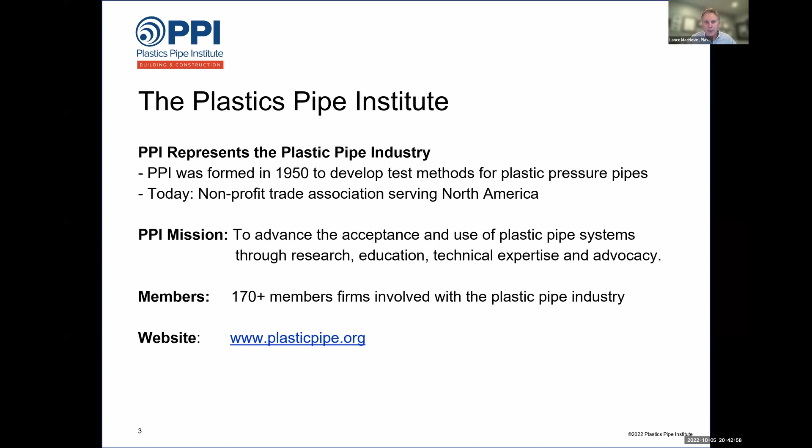These are companies that make plastic pipes or the materials or the equipment or the certifiers. They all pay dues to belong to our association every year, and that's what pays for the staff, people like me. Within PPI, if you go to our website, the first thing you'll have to click on is select a division.

And we have 5 different divisions. Everything related to plumbing and mechanical falls within the building and construction division. So we probably should be known as plumbing and mechanical, but we're known as the building and construction division, or BCD. And the materials that we represent are kind of shown in this family picture down below.

So in alphabetical order, we focus on the pressure pipe materials shown here: CPVC, HDPE, PEX, PERT, PEX aluminum PEX, and polypropylene. And by the way, we're a nonprofit trade association.

We don't sell anything. We're, like I said, supported by our members, and a big part of our job is to do education, and to promote the products and teach people how to use them correctly and things like that.

So these pressure pipe materials within the building and construction division are used for the kinds of plumbing and mechanical applications that you can imagine, shown here in the picture. That's plumbing and water service, fire protection. On the mechanical side, we've got radiant heating, radiant cooling, other kinds of hydronic piping, outdoor snow and ice melting, and geothermal systems. Those applications are served by all these types of plastic pipes, and we get involved with all of those.

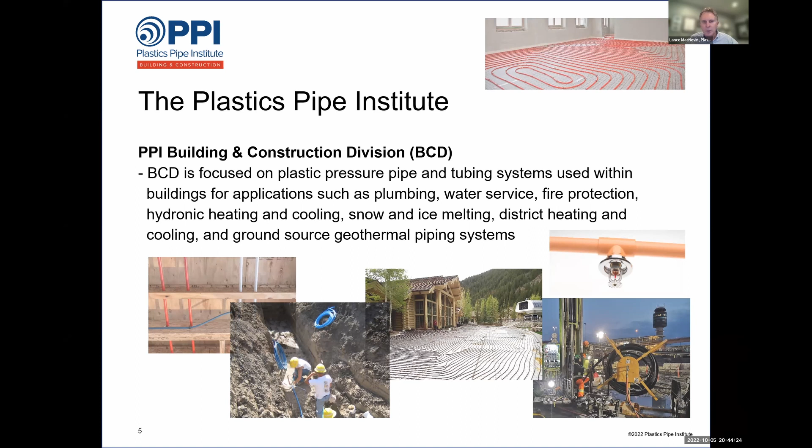So that's a bit about me. In terms of introducing the course and getting you ready for what we're really going to talk about here tonight, we're going to first introduce the 6 types of plastic pipes that we'll find in construction.

And these are plastic pressure pipes used in construction. So again, alphabetically, we've got CPVC, which we're going to talk about tonight, HDPE, which stands for high density polyethylene, PEX, which stands for cross-linked polyethylene, a newer material known as PERT, polyethylene of raised temperature resistance, and a family of materials known as polypropylene.

So there's polypropylene pressure pipes. There's also polypropylene used as vent pipes, but we're not going to talk about that. We don't get involved with that. And there's PVC pipes, which are both used as pressure pipes and then obviously as drain waste vent pipes. We don't get involved with PVC pipes either. There's actually other trade associations that focus on PVC, so that's not us.

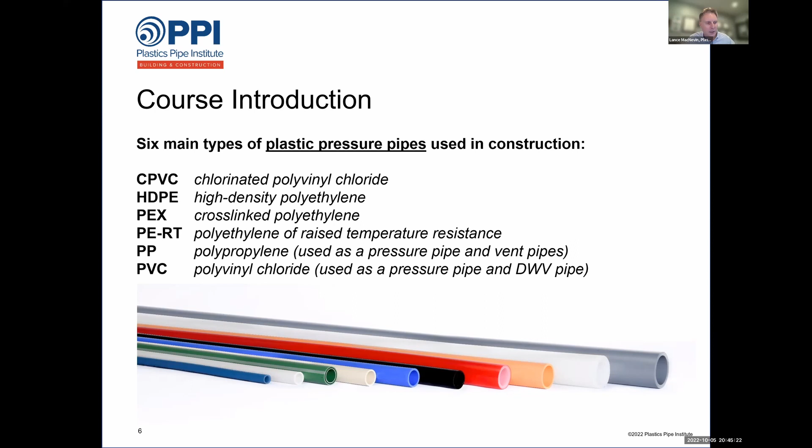So what we are going to focus on tonight, though, are the 2 most common types of pipes used for hot and cold water plumbing and hydronic applications inside homes and buildings.

The way that we know the two most popular pipe materials are PEX and CPVC is this graph here, which is market data from Home Innovation Research Labs, from an annual report they sell called the Builders Practices Survey Report. This is basically just asking builders around the country what kind of pipes they've used lately in the past year.

What this data shows is when it comes to new residential construction, about two-thirds of all new houses around the country are using PEX or PEX aluminum PEX, which is less common. The next most common material is shown by the red line, CPVC, then comes copper, and then some of the other materials down at the bottom.

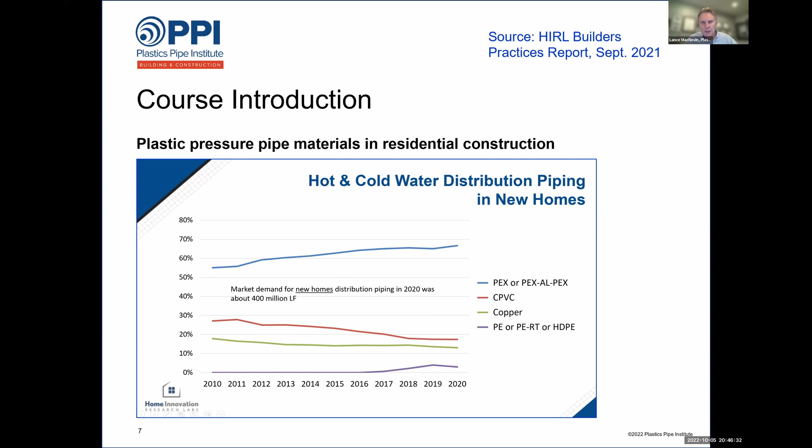So we're going to focus on PEX and CPVC, the most common ones. But here's our course outline. First, we're actually going to talk about polybutylene, which isn't used anymore and hasn't been for sale for 25 years in North America. But we are going to show a few pictures of that for recognition purposes, so that when you're looking at a house and you see plastic pipe and you're trying to figure out what it is, we'll give you some codes and markings to look for to identify if it's polybutylene or not.

Then we're going to talk about some universal requirements for plastic pipes, having to do with health and safety requirements that apply to all kinds of plastic pressure pipes. Then we're going to get into CPVC in detail and talk about its history, its capabilities, the standards used for CPVC pipes, some test requirements, and the joining systems, with lots of pictures.

Then we're going to do the same thing for PEX: talk about its history, its capabilities, the standards that apply, some test requirements, and the joining systems for PEX. There's lots of different fitting systems on the market for PEX, so we've got pictures of them all that we'll show so you know how to identify them.

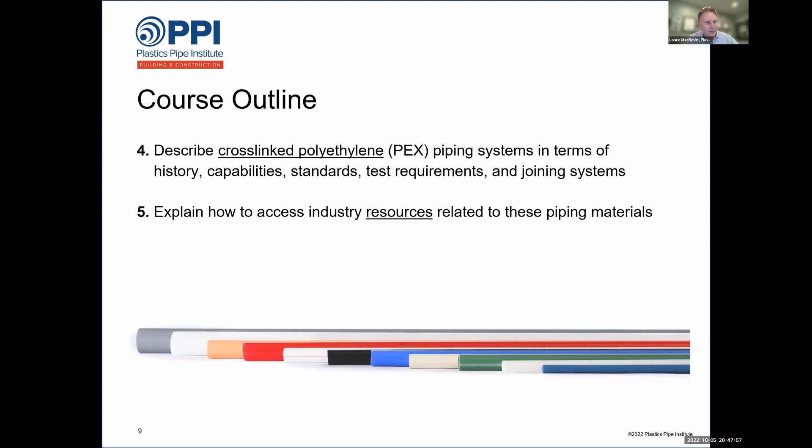Then at the final part, we'll talk about how to access some industry resources. I'm going to give you a very quick tour of our own website so you can find some of the really important information that's on there. Again, it's all open to the public, it's all free, and there's a lot of good resources out there.

So that's the plan, and we'll start at step one, which is polybutylene piping systems. Again, this is a bit of a trip down memory lane. Polybutylene systems were introduced way back in the 1970s as an alternative to copper. People loved the flexibility, the fact that it came on a coil - you could have longer lengths with fewer joints and just bend the tubing around trusses and other obstructions inside the building. It was faster to install and less expensive than copper, even back then.

This map is not ours - it came from some lawyer website. The darker blue equals the states where polybutylene was more likely to be used. So a lot of you tonight are probably in some of those states and have come across this quite a bit.

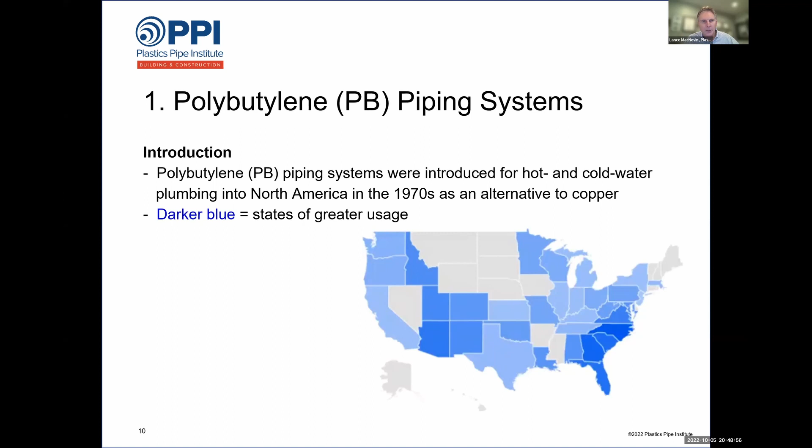You probably also are aware that by the 1980s, some of the polybutylene systems already were experiencing some failures. Most of those failures were called premature oxidative failures, where the product became brittle and then would fail. Most of the early failures were actually in the fittings. The gray plastic fittings that were used from the beginning with polybutylene were not actually made of polybutylene - they were made of a material called polyacetal. The chemical code name for that is POM, which sometimes may be marked in those fittings.

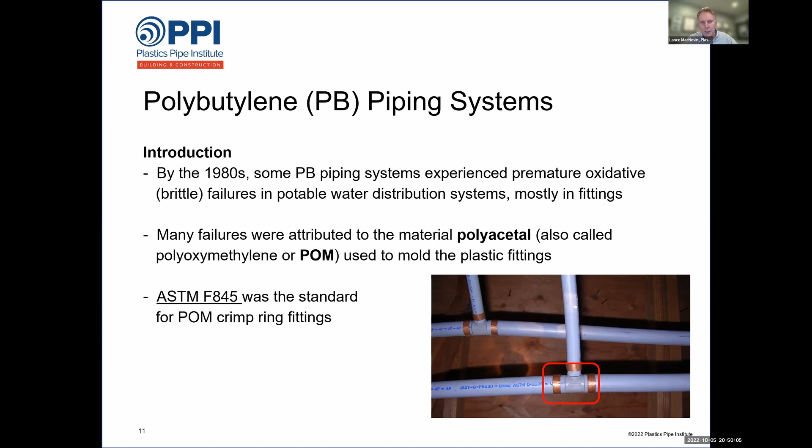It turns out that polyacetal was just not very resistant to chlorine at all. Cold chlorinated water, cold water - no problem, but hot chlorinated water is a problem. And the fittings would start failing quite prematurely. The standard for those fittings is called ASTM F845. So if you're ever looking at one of those fittings and trying to identify if this is a polyacetal fitting, it should be marked with F845 on it.

So here's just a close-up of a couple of fittings in one of these systems. These are crimp ring style fittings, so the copper rings are the crimpers. A tool is used to crimp those copper rings over the tubing, compressing the tubing over ribs in the fitting. It's a good design of fitting, and the fittings themselves were strong enough and everything else.

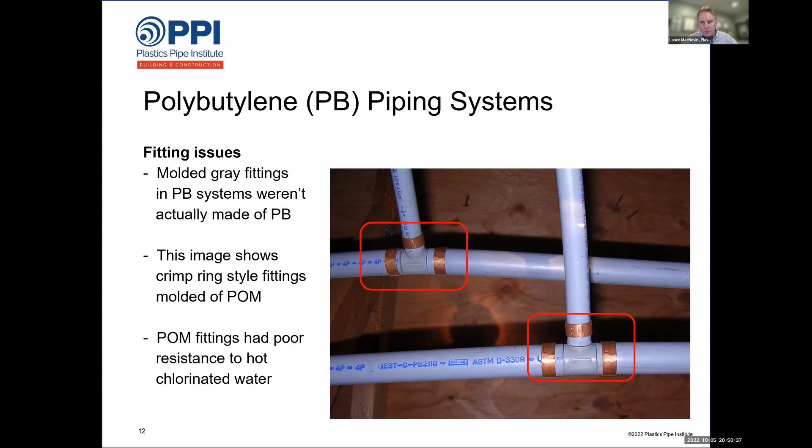But the problem is if they were attacked by the hot chlorinated water, then they would start to oxidize, which is kind of like you getting a sunburn. If that's ever happened, basically from the fitting's perspective, if you sliced one in half and looked inside, you'd see a white chalky surface inside if it's truly being attacked by hot chlorinated water.

And that chalky surface allows some of the material to dissolve into the water and wash away. It's really breaking the molecular bonds between the material. Even if it's not washing away, it's losing its strength and getting very brittle. Especially for an elbow or a T, if there's any kind of stress on the fitting, they could just crack apart and break apart, and you'd have a big gusher kind of leak.

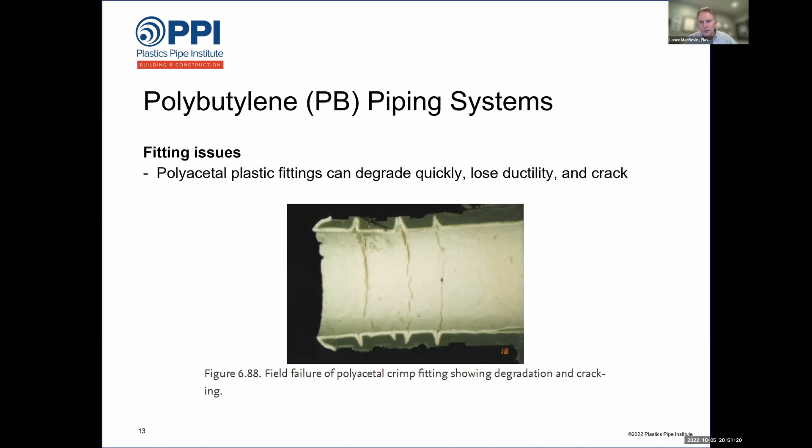So a lot of those fittings have already failed up till now, and have been replaced because they just wouldn't have lasted this long in a lot of cases.

So what the industry did when those fittings started failing is they developed copper crimp fittings. In this case, the whole fitting was made of copper or brass, but copper was really popular in the beginning. Those fittings were made to a different ASTM standard called F1380, and they were good.

The material, the copper, was fine, and the copper crimp rings were fine, and the compression, the seal was fine, and they were great—unless you're in a place where copper actually gets attacked by the water. There's a lot of those places around the country where copper does just get attacked by the water, which causes all kinds of different types of corrosion inside the fittings.

So then what the industry did to try to eliminate the amount of fittings in the wall is they came up with home run plumbing systems with centralized manifolds, accessible normally in the mechanical closet where the water heater was. You'd run a dedicated piece of tubing, either 3/8 or 1/2-inch tubing, directly from that manifold to each outlet or fixture—directly to a shower head or a shut-off valve below a toilet or a sink.

And therefore, it would be a continuous piece of tubing inside the wall from start to finish with no actual fittings. So you're completely eliminating the risk of fittings inside the wall because there is none. You've probably seen lots of manifold systems out there, also known as home run plumbing systems. It's a lot like electrical wiring from a circuit breaker.

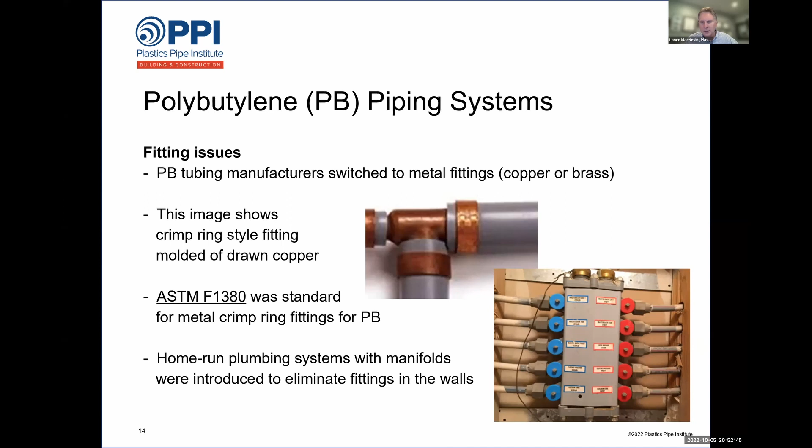But there were still failures, and even with good fitting systems, or even with no fittings inside the wall, sometimes the tubing still failed itself.

Without getting into all the details, some of the polybutylene that was used was just not that chlorine resistant. A lot of it was great, and it all could have been great, but some things were done in the industry that ended up using some, let's say, less than perfect materials for polybutylene in a few different cases. And in some cases, the installers just didn't know how to deal with the material properly.

They would scratch it or gouge it during installation, or kink it and then straighten it up with a pair of vice grips and put it in service. But that damage would sink into the tubing over time and lead to some stress points that eventually would fail.

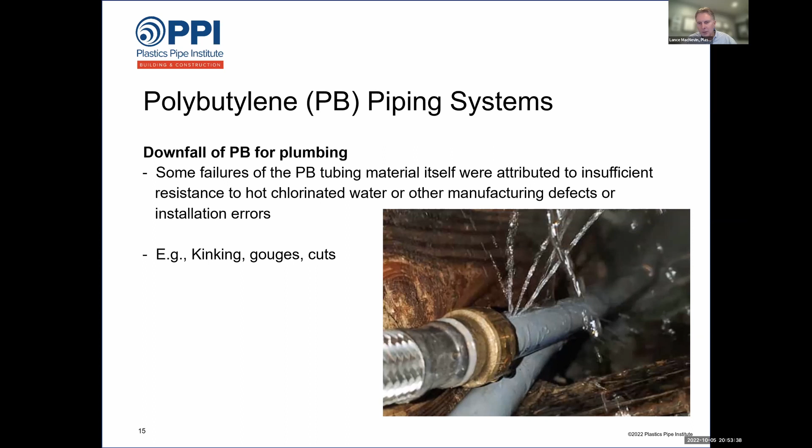So some of the polybutylene tubing definitely has failed, is failing, or will fail in the future, but not all of it. You're probably all aware of the very large lawsuits that were settled. This goes back to the mid-1990s and the late 1990s. Some of the biggest class action material lawsuits ever were about polybutylene tubing.

The companies involved with that were Shell Oil, which made the polybutylene resin itself—they didn't make the tubing, but they made the material. And then two other companies: one called Hoechst Celanese, a European supplier, made the polyacetal material, and DuPont also made the polyacetal material under a different brand.

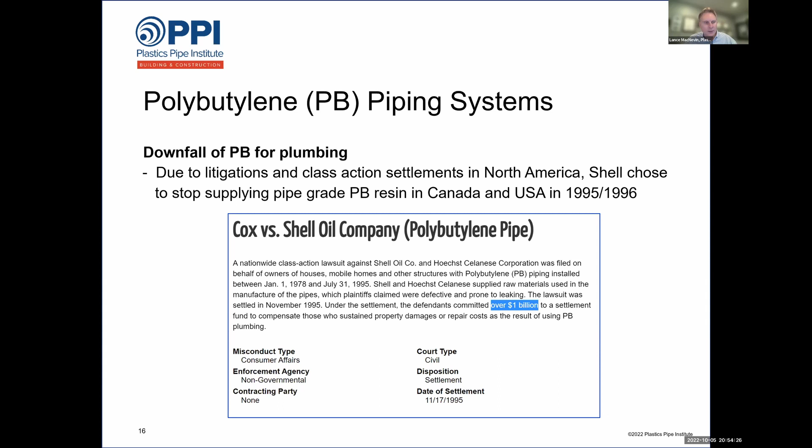So those three companies ended up being involved with this lawsuit and ended up paying out probably close to $1 billion in different kinds of settlements around the country for pipe replacement.

So to help identify these products, here's another close-up of the tubing. From left to right, the markings you see: Qest was a brand name. US Brass was one of the manufacturers of the tubing, and their brand name was called Qest. That's marked on this tubing here. It's nice that you can see the brand.

PB2110 is a material code for the actual type of polybutylene material used for the tubing, and that's the material allowed for hot and cold water tubing. The NSF-PW mark shows that the tubing was tested and certified for drinking water safety - PW means potable water, and it was tested by the organization known as NSF in Michigan. And then ASTM D3309, that was the ASTM standard for polybutylene tubing. So this tubing is well marked, well identified, and we know exactly what this was.

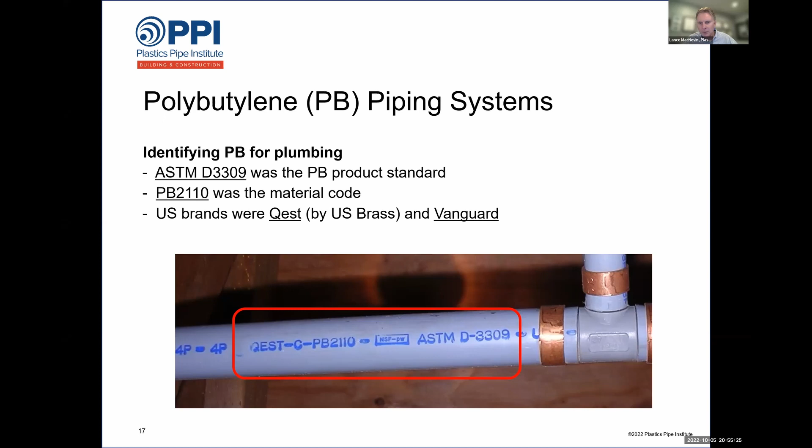Now there was other polybutylene tubing used for other purposes as well. Water service line was a popular application for polybutylene. And in fact, in my house where I am right now, my house was built in 1993, and I know for a fact it has polybutylene water service line.

And in this case, the pipe is just a cold water service line pipe. It didn't fail because of chlorine in the water. It actually failed simply because where it was connected to the curb stop in the meter box, it wasn't backfilled very well. And with all the movement of the ground over 25 plus years, eventually there was scraping and gouging in the pipe, and it eventually just cracked.

The pipe did become less flexible over time, and all the movement at that joint by the valve, it just couldn't take it anymore. Then one day a crack opened up and it started leaking, and the water department called the homeowner and said, 'You've got a leak, fix that or else we're turning your water off.'

And it lasted until about 2018, I think, when my neighbor's service line failed. That's when I got this sample - a good 25 years or so. The pipe for my own house is 29 years old. It's still going strong, and I have no plans to replace it unless it ever fails on its own.

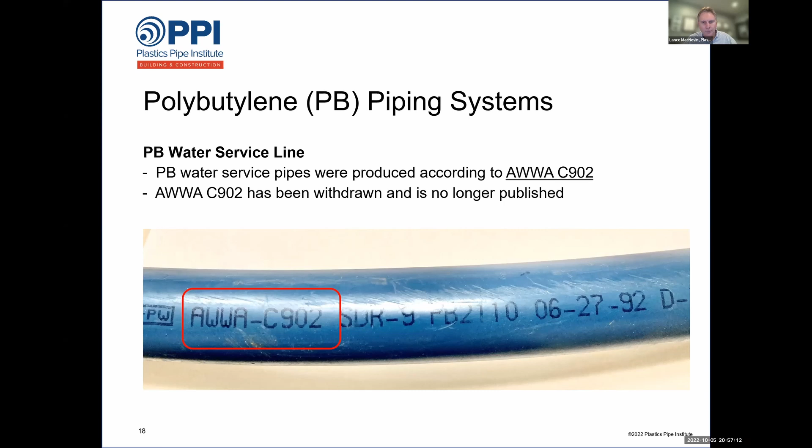And then I have a coil of PEX in the back closet that I'm going to use as the replacement. We'll talk about PEX here later today.

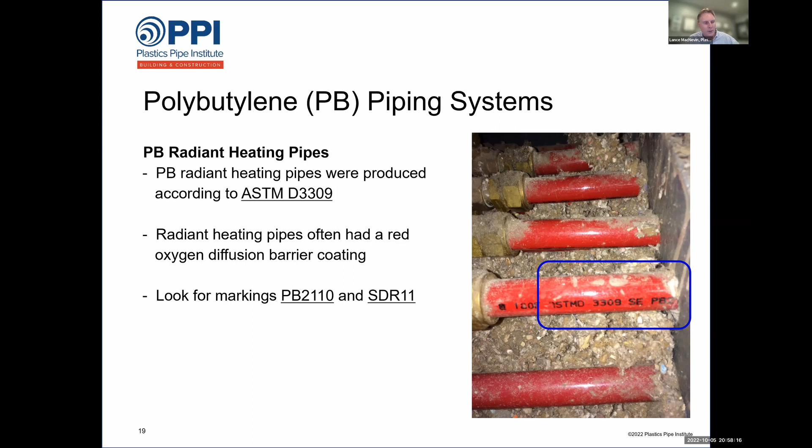In this case, this tubing could easily last for 50 years. I don't know how old this picture is or how old this tubing is, but there's a very good chance it could last for 50 years or more, because most radiant heating installations, if well controlled and well installed, don't need to run at very high temperatures - maybe just 120 degrees Fahrenheit or less on cold winter days. So this tubing could easily be there for 50 years or more and be completely okay.

There is a document on the PPI website that you can access, because what we're going to be talking about later this evening is cross-linked polyethylene, or PEX, and PEX is a lot better than polybutylene. In fact, we even have a PPI document on the website, called TN31, that explains the differences between PEX and polybutylene.

The first is that PEX tubing is cross-linked. I'll explain that with a picture in a few minutes. But what that means is when you have a piece of PEX tubing, most of the molecules of polyethylene are actually cross-linked and linked to each other. So a piece of PEX tubing is kind of like a chain link fence with all these molecules connected to each other. That makes the tubing both more flexible, like a chain link fence, but also gives it a lot of toughness and resistance to scratching, gouging, and cracking.

PEX tubing also has a thicker wall than polybutylene did. It's SDR9 - I'll explain what that means in a few minutes - but it means the wall thickness for a given diameter is about 22% thicker than it was for polybutylene. So that makes it tougher.

And nowadays, ever since the year 2002, it's been a mandatory requirement that all PEX tubing for water be tested for chlorine resistance, and that was not a requirement for polybutylene. It turns out polybutylene was slightly resistant to chlorine, but not good enough in many cases around the country where higher levels of chlorine are used. So now it's a requirement for PEX to prove it's resistant to chlorine, but that wasn't even a system in place for polybutylene back in the 80s and 90s.

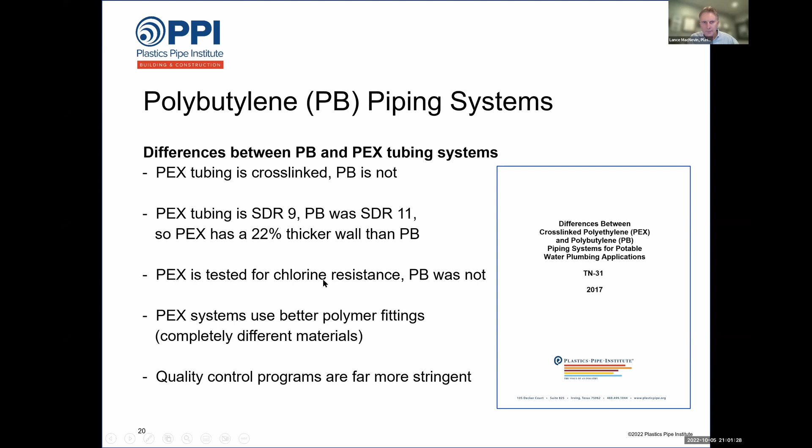So companies not only have no incentive to cut corners because of our legal system in the US, they're also highly regulated and highly controlled so that they couldn't cut corners if they wanted to, because they would get caught. So the industry today is much better than the industry was 25 years ago.

And just to summarize the polybutylene topic: the first thing we said is that polyacetal fittings were susceptible to hot chlorinated water, and that led to a lot of their failures. Some of the polybutylene was also susceptible to hot chlorinated water. But there's a lot of polybutylene tubing that is perfectly okay in cold and hot water plumbing systems and will easily serve out a life of 50 years.

But it all depends on the quality of the tubing, how nicely it was installed, whether or not it was abused during installation. It also depends on the temperature of the water system it's in and how much chlorine is being used in that town or by that utility. So some of the polybutylene will be around for 20 more years, whereas other polybutylene won't. In fact, there could be a failure tomorrow somewhere of polybutylene that's just reached its end of life.

So that's about it on polybutylene, and I guess we'll take questions via chat.

The next thing I was going to touch on - we're calling this part an introduction to plastic pressure pipes - and we're going to just touch on some terminology that applies to all different types of plastic pressure pipes, so you understand the rules that apply to the industry and what some of these terms actually mean.

And the first thing we're going to introduce is the topic of the standard dimension ratio. The official definition is given here: it is the ratio of the outside diameter to the wall thickness, calculated by dividing the average outside diameter of the tubing by the minimum wall thickness.

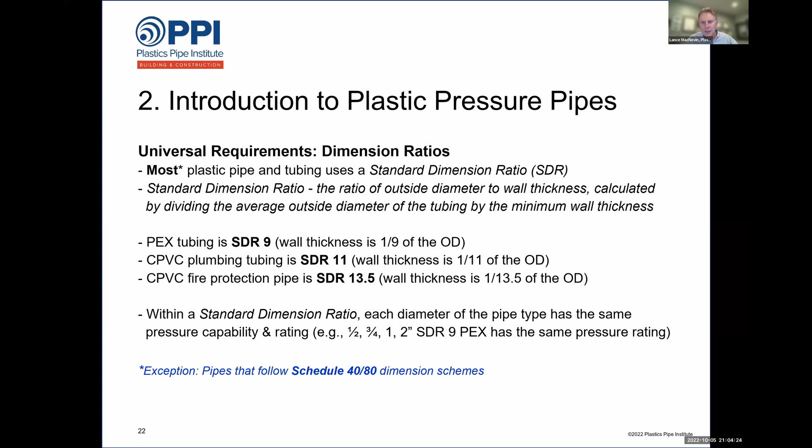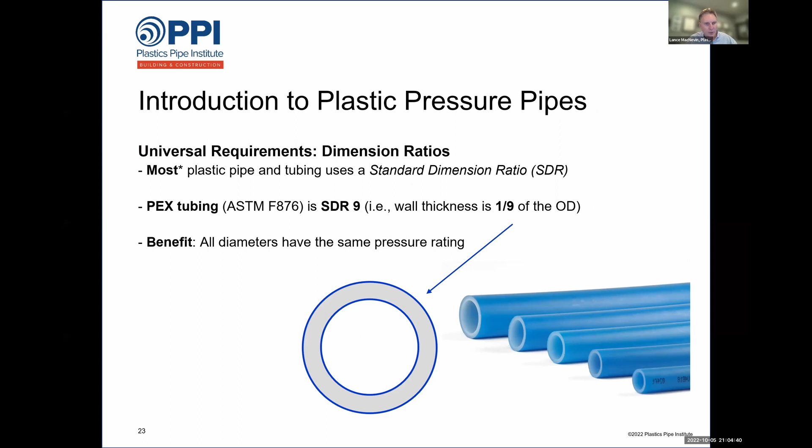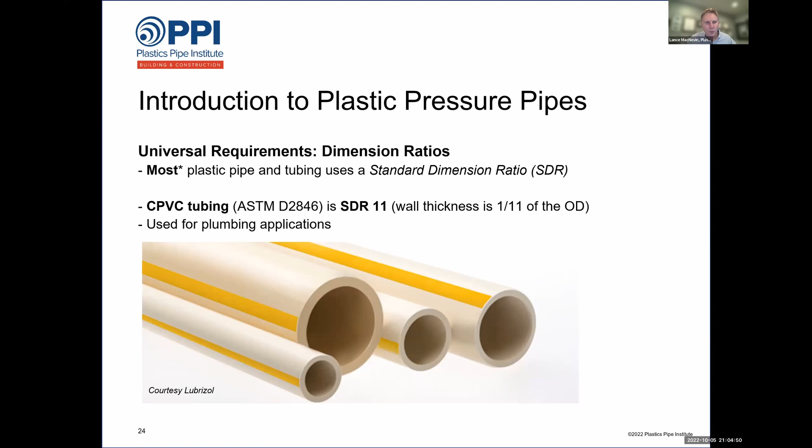Here is a close-up of CPVC tubing, commonly used in residential plumbing. This is SDR11, so again the wall thickness is 1/11 of the diameter. That's just some terminology from the plastic industry that we thought you'd want to know.

The other thing we want to touch on is a universal requirement having to do with drinking water safety. It's a requirement by state law and by our plumbing codes—Uniform Plumbing Code, International Plumbing Code, National Standard Plumbing Code, Canadian Plumbing Code—that any pipes or fittings used for hot and cold water must be tested and certified to this standard, known as NSF 61, or the full name NSF ANSI CAN Standard 61, toxicological evaluation for materials in contact with drinking water.

I won't get into all the details of how they do that testing. It takes about a month and a half to test a given pipe or fitting, and it costs about $15,000. It's a very stringently done test.

What they do is basically put super clean, purified water in a pipe or fitting, and leave that water there for a little while, then take the water out to see if it extracted anything from the tubing or fitting that could potentially affect human health. They test for hundreds and hundreds of chemicals that could come out of plastic.

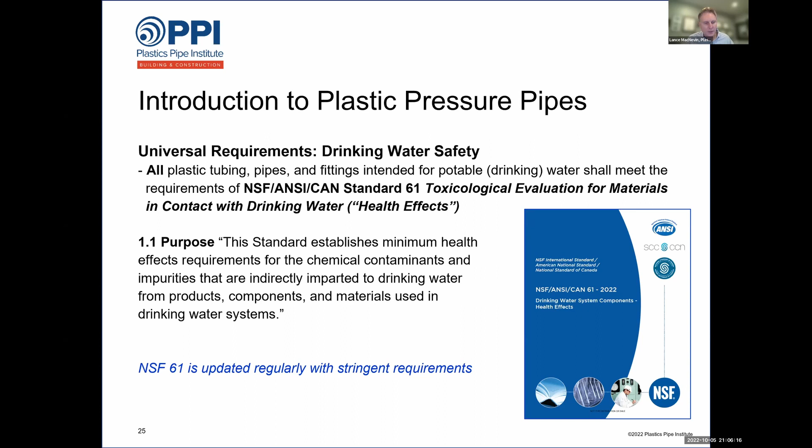Only the products that pass that test get to have the letters NSF-pw on them, or the code NSF61 marked on them, to show they've met this requirement. This is a mandatory requirement—it's not optional.

One other universal requirement has to do with the pressure rating of both CPVC and PEX tubing. Both of these products, as called out in some of the codes, must be rated for a pressure of 100 PSI at 180 degrees, and those are continuous use pressure ratings.

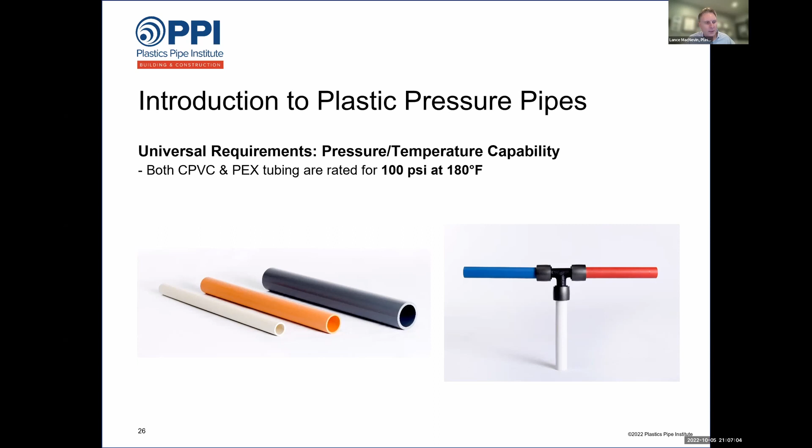So the products go through what's called long-term hydrostatic testing in laboratories—years worth of testing, sometimes literally more than 2 years—at elevated temperatures and pressures, to be able to predict these products should withstand 100 PSI at 180 degrees continuous temperature for 50 years or more. That is the expectation of today's plastic piping products.

And then, of course, when it comes to the benefits of plastic pipe—why are we even talking about plastic pipe, why would people want to use plastic instead of copper—obviously, it's the cost. It's a lot less expensive, and it's a lot easier to install plastic because of the flexibility, especially with PEX versus copper.

But there are lots of other benefits as well in terms of the products being smoother—you don't get mineral buildup. It's also better for the planet to make plastic pipe than copper. Just look up a copper mine and you'll see what it takes to actually extract copper, produce it, and convert it into tubing.

The plastic tubing is a lot less expensive. Obviously, it's not going to corrode. Corrosion is impossible, so that's a big deal.

It can withstand really high velocities. It can withstand surge pressures when you have fast closing valves, like at a washing machine or an ice maker. So the plastic products can actually absorb those surge pressures, so there's less chance of water hammer. And they're general insulators - inherent insulating properties apply to both PEX and CPVC, so they actually reduce heat transfer.

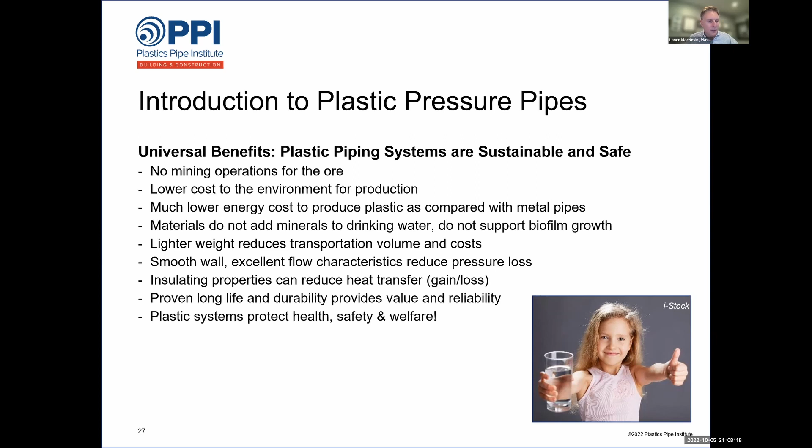So there's a lot of benefits to plastic, not just being less expensive, which is a good thing, but all kinds of other functional, practical benefits as well.

Now we're going to get into the details of each of these materials, starting with CPVC piping materials. We're going to focus on CPVC tubing, pipes, and fittings. When we say tubing, that means a copper tube size product. When we say pipe, that means an iron pipe size product. Residentially, you're always going to find products that are copper tube size, meaning they have the same outside diameter as copper. But in commercial plumbing systems, you would find more the iron pipe size, IPS pipes. So essentially, they're the same products, but with slightly different dimensions between a tubing and a pipe.

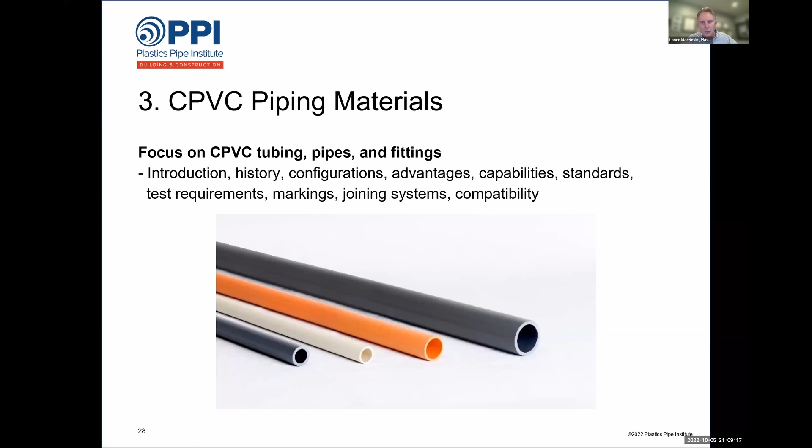We're going to talk about the history, the configurations, the advantages, the capabilities, the standards that apply to these products, some of the test requirements, the markings that you should see, the joining systems, and a little bit on chemical compatibility. So first of all, introducing CPVC.

What it is, it's a PVC material that has been chlorinated via a free radical chlorination reaction. That's what the chemists tell me to say. I don't know exactly what that means - I'm a mechanical guy, not a chemical engineer. But basically what they're doing when they make CPVC is they start with PVC raw material and they add an extra chlorine molecule to it.

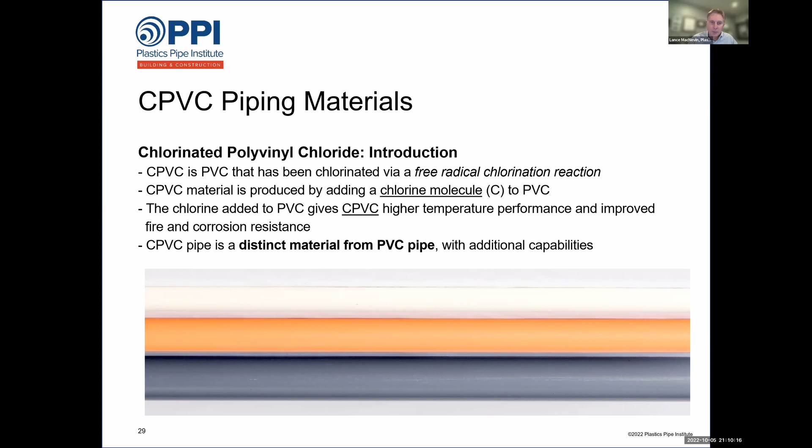Well, no, I'm listening. So that extra C in CPVC really does make a big difference. It makes the product able to withstand extremely high temperatures and higher pressures, and gives the product other better properties as well compared with PVC. It's more expensive, but it is a better product. And PVC is not approved for hot and cold water distribution inside a house, but CPVC is. So this is the product that we're talking about here, and it's actually been around for a very long time.

CPVC, like I said, it's rated for high temperatures. The tubing is rated for continuous operation up to 180 degrees Fahrenheit. It can actually withstand much higher temperatures than that, but 180 degrees Fahrenheit is as high as the markings go, for safety. But it's been around for a very long time.

In fact, B.F. Goodrich, which was a chemical company and still is, actually developed CPVC materials way back in the 1950s, and they made the first CPVC pipes in the mid-50s, then sold the first CPVC plumbing system in a house in Ohio, I think it was, or maybe Indiana, in 1959. So that's more than 60 years ago now, and that house is still being monitored and still in operation. So it's been around for a long time.

It's not that new. CPVC was then introduced for fire protection systems in 1985. And again, the alternative there was copper or steel, which would corrode, and CPVC wouldn't corrode. So it was a huge benefit over the metal pipe systems for fire protection systems. So this is not a new material - it's been around for a long time.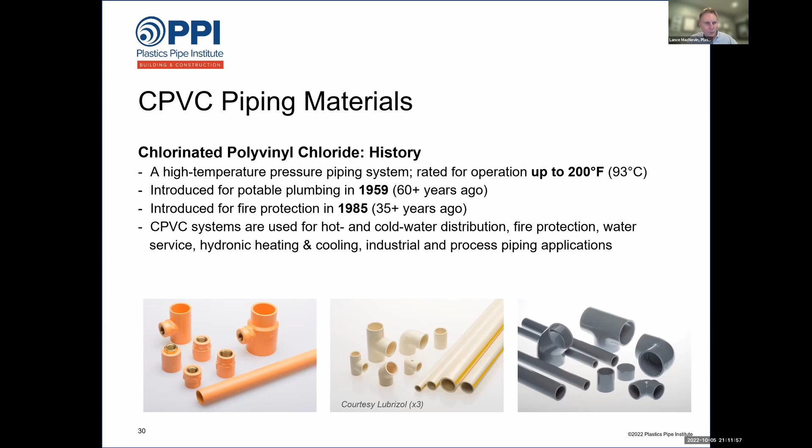There's three different colored pictures shown on the bottom. The orange is typically the version of the product that's used in fire protection. The gold version is usually the version made in copper tube size dimensions for residential plumbing. And then the grayish product is the one that's usually made in the iron pipe size dimensions for commercial plumbing, hydronics, or other kinds of industrial applications. Essentially, it's all the same product, but slightly different versions of CPVC for the different applications.

In terms of configurations, this is not coilable. This is not off a flexible roll. It is provided in straight lengths. The copper tube size diameters go from 1/2 to 2 inch, and they're all SDR11. And then the iron pipe size diameters go from 1/2 inch to 24 inch. You can get the IPS materials in Schedule 40 or Schedule 80 or several different SDRs. And then you get obviously the different fittings molded for the right size.

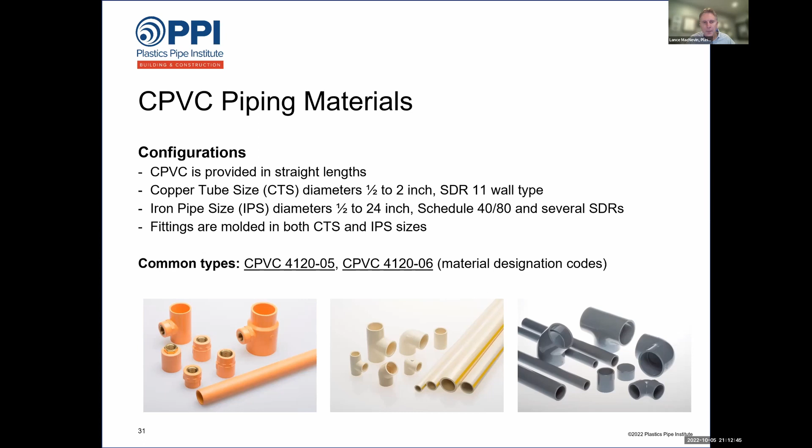The material code for CPVC for plumbing applications is either CPVC 4120-05 or CPVC 4120-06 - slightly stronger material. Those are the material codes that you would actually see in a piece of CPVC pipe or tubing.

In terms of what the product is capable of, without getting into all the nitty-gritty details, there's a document you can get on the PPI website called TN62, which describes a lot of the detailed capabilities of CPVC in terms of its chlorine resistance, its resistance to chemicals, high temperatures, and high pressures. It really is a very versatile, fairly amazing material that's not very expensive at all, but can be used for a lot of different applications, with over a 60-year history now.

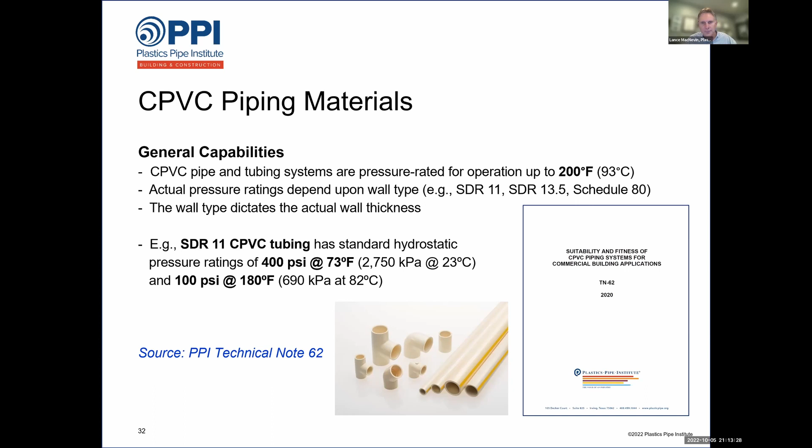When it comes to standards, there are a lot of different ASTM standards for the different versions of CPVC, so this list looks a little messy here. But on the residential plumbing side of things, the copper tube size version should always be marked with ASTM D2846, the first standard shown on this list. That standard number should apply to the tubing and the fittings used in residential plumbing.

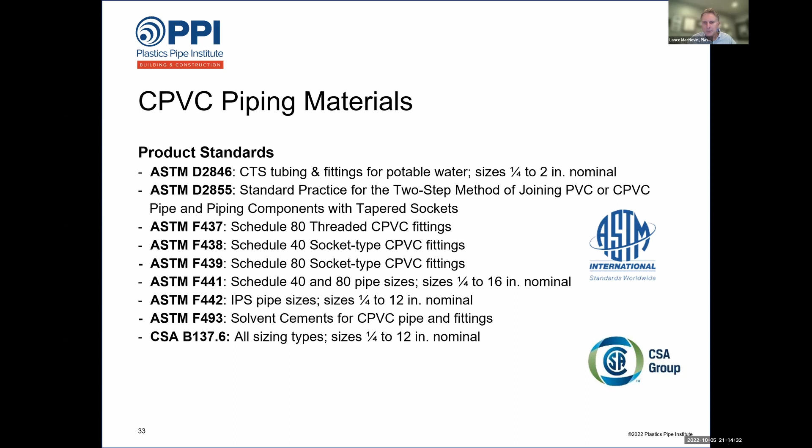Once we get into the iron pipe size versions, Schedule 40 and Schedule 80 types, then for some reason there are lots of different standards specifically for the different types of fittings or specifically for Schedule 40 and 80 pipe sizes, or the IPS sizes. There's this big list of individual ASTM standard numbers here. So if you picked up a piece of gray CPVC pipe, it could be marked with F438, 441, or 442, depending on exactly what dimension scheme it was produced according to.

In terms of the actual markings, this is an image of CPVC tubing, and the markings you should see would always be the size, the diameter, like 1/2 inch, the wall type—that is SDR11 in this case. The manufacturer's name or trade name should always be there. So the name could be Charlotte Pipe, or the trade name could be FlowGuard Gold, or it could be the company name Spears. There are different companies out there that make CPVC pipe and tubing. The ASTM standard number is going to be marked on there, D2846.

The pressure ratings at both 73 degrees and 180 degrees will be marked on there. The material designation, like CPVC 4120, would be there, and then certification symbols from the laboratory that actually tests and certifies this product. There could be 2 or 3 of those—it could be NSF, it could be from CSA, it could be from International Code Council. There could be a whole bunch of different certification symbols on the product to reassure the customer that this product is very well tested and quality controlled.

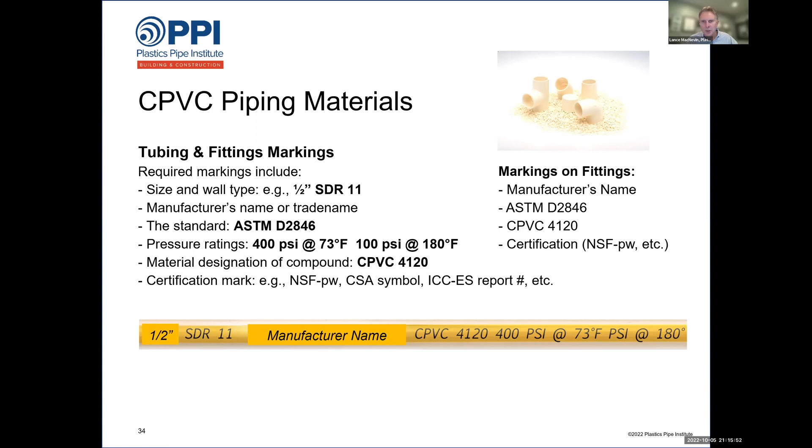You'd find most or some of those same markings on the fittings as well—not as much because they're smaller, but a lot of the same markings will also be on the fittings. When you come across CPVC pipe, the markings will be similar, not exactly the same, but very similar. The main difference is the ASTM standard number would be different if it's an iron pipe size version, but otherwise most of the same markings would be on the pipe.

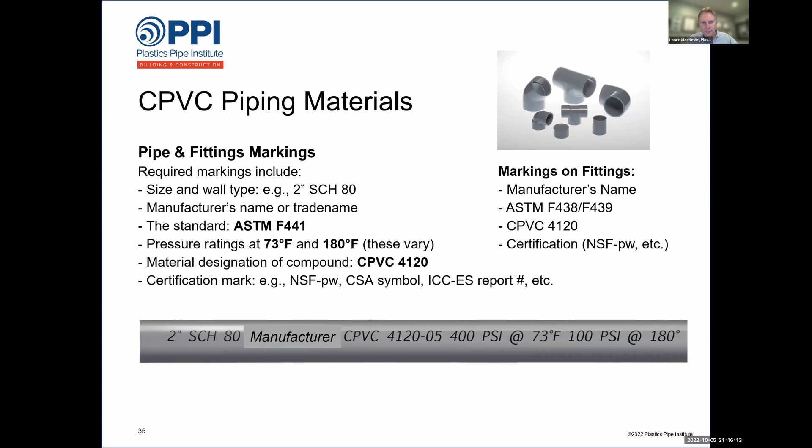So now let's move into CPVC joining in terms of how this is connected. There are really four main types of connection or fitting systems for CPVC: solvent cement, push fit fittings, grooved mechanical fittings, or flanged connections. The second two are not likely to see in a residential application, but more in some sort of commercial application.

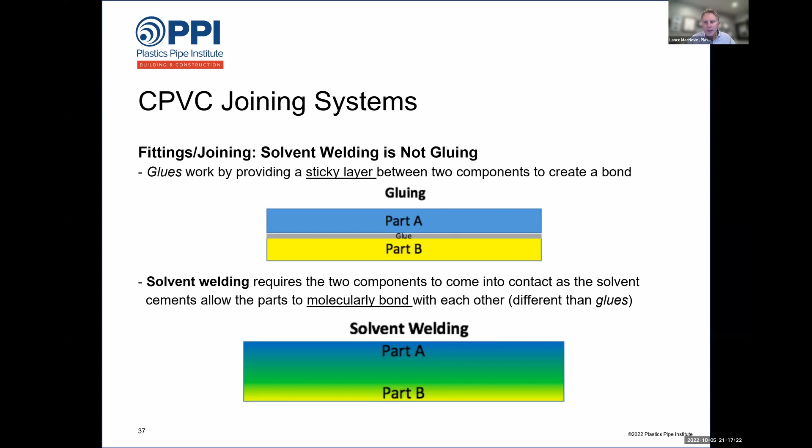It melts them for a little while until the solvent evaporates. And then the molecules from one part flow into the other part, and they join themselves to each other. So that's the basic principle of solvent cement.

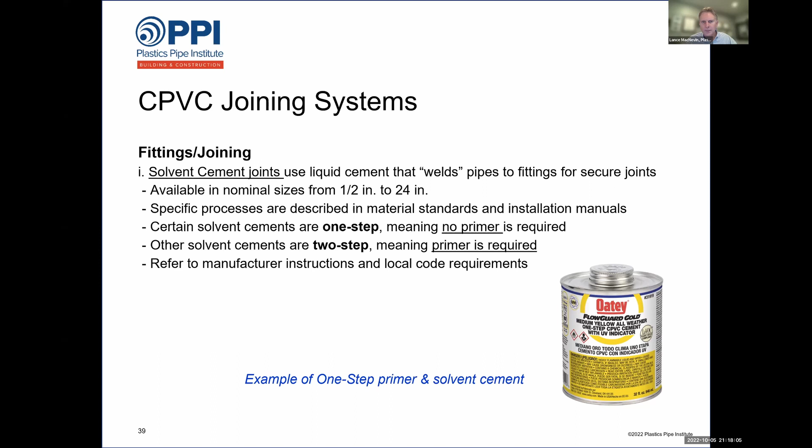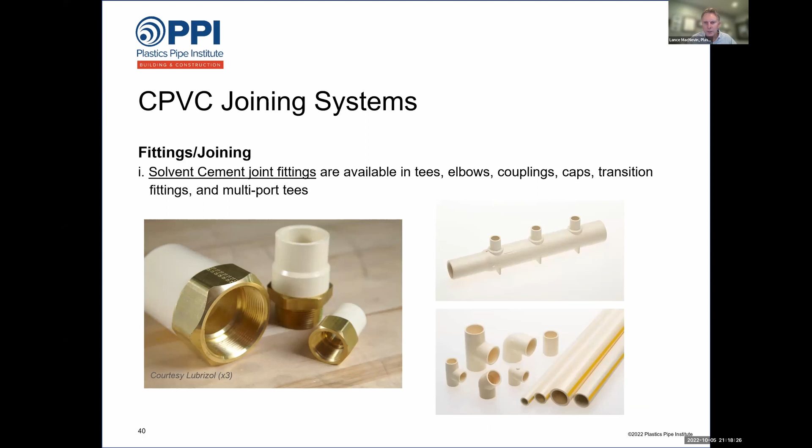In terms of what these fittings look like, here's an example of different types of fittings. You can get threaded adapters with metal ends as part of the fitting to allow you to do a connection, maybe to a water heater or something. You can actually get molded manifolds for plumbing, molded out of CPVC, and then all kinds of elbows and T's, 90 degrees, 45 degrees, caps, plugs, couplings. There's a pretty big range available.

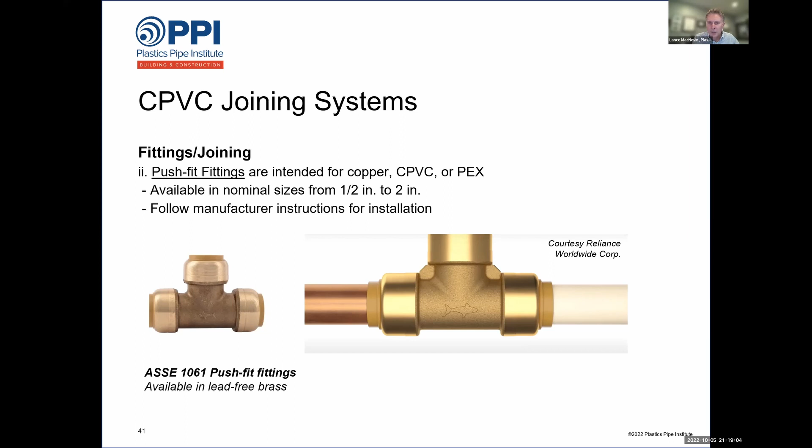Another way of joining CPVC is using push fit fittings, and you probably recognize these as SharkBite fittings. SharkBite is one brand of these push fit fittings, but there's other brands as well. They were originally developed in Australia about 25 years ago, and they work just as well in CPVC as they work in copper because both products have the same outside diameter. You don't have to do much to prepare the CPVC. Just give a good clean square cut, make sure there's no burr on the end of the CPVC, and then just push it into the fitting. Follow the instructions, and you'll have a good secure joint with those fittings.

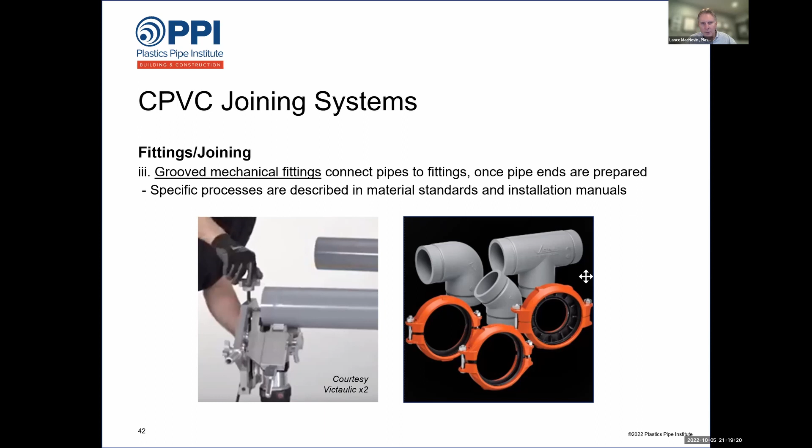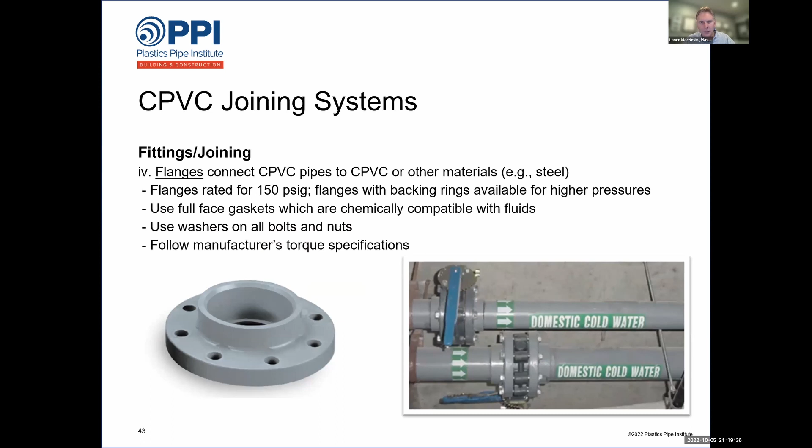There are grooved mechanical fittings sometimes used with CPVC. You're probably familiar with Victaulic style fittings. You're not likely to see these residentially, so I'm just going to move on for now. And the same with flanged fittings. A lot of commercial plumbing systems will put a flange in the end of the CPVC pipe to allow the pipe to be bolted up to a valve or a piece of steel or something else. Not likely to see residentially, but commercially, you could very well see a lot of flanged connections out there.

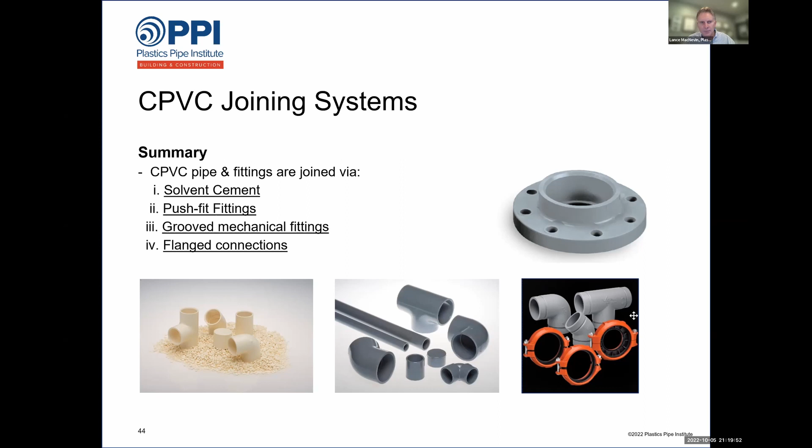So those are the four main fitting types for CPVC. And again, by far the most common is going to be the solvent cement type. That's probably what's used at least 90% of the time. Very secure. One thing to know about CPVC is that it is sensitive to some types of chemical contact.

And some of the types of chemicals that will affect it negatively, you might not imagine. But they've learned this the hard way. Companies like Lubrizol, which is a big company that makes most of the CPVC resin out there, have actually done compatibility testing with almost any chemical you'd ever find on a job site. And they publish the results, so they make this really obvious and easy to find. They provide a lot of training to the installers to make sure the installers don't make mistakes and put incompatible chemicals on the CPVC, because if they do make a mistake, they can actually damage the product and it'll get weak over time.

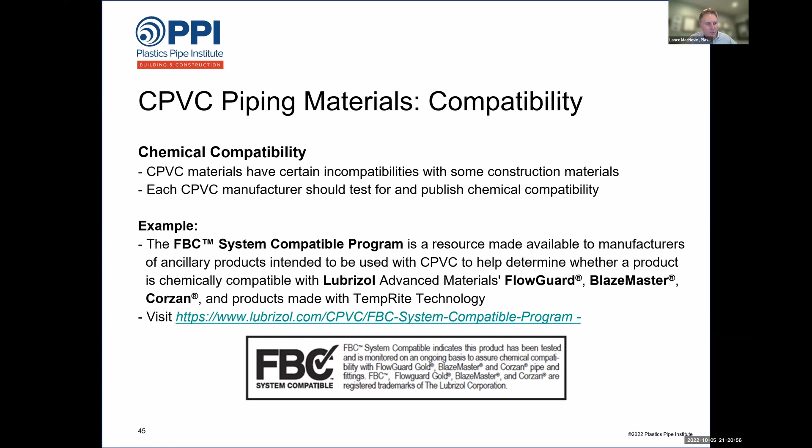So the best way to learn more about whether or not a given product is compatible with touching CPVC is just to go to their website. There's a link here. You can just go ahead and Google the letters FBC system compatible, and then you can search for different types of products, whether it's a fire stop product, some other type of sealant, or some other sort of chemical on a job site, and just go ahead and do the search to see if it's compatible. There's even an app for that. In the App Store, you could download Lubrizol FBC and check their literature. That's assuming it's a Lubrizol product. The other major manufacturer of CPVC is called Spears, and you'd have to go to their website as well to check compatibility with their product because it might not be exactly the same.

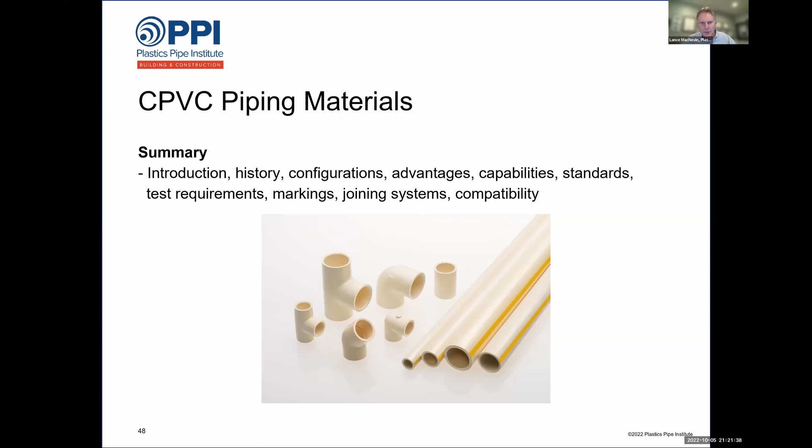So that wraps it up on CPVC, a pretty quick tour, but we want to save time for PEX as well. So now we're going to move on to our section on PEX, and we're going to introduce PEX in the same way we did with CPVC: introduction, history, configurations, advantages, capabilities, standards, markings, and joining systems.

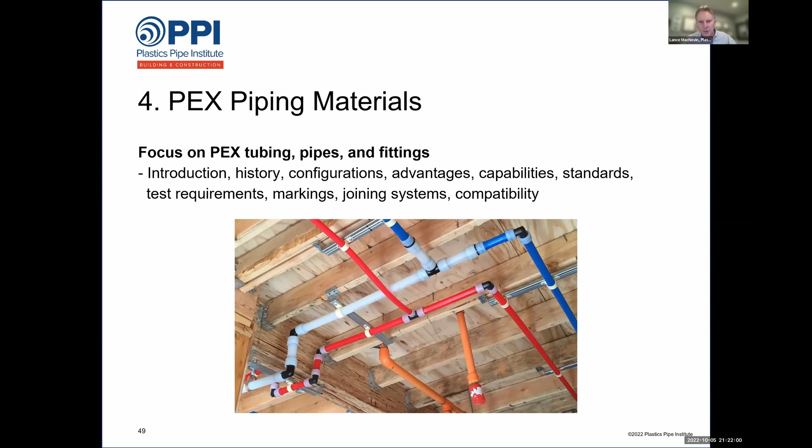There's not much to say about PEX compatibility at the end here. There's not many chemicals on a job site that would damage PEX, so very little to say.

So at the beginning, to explain what PEX is: the official definition is that it is cross-linked polyethylene. You're probably familiar with polyethylene in pipe form, as water service line or geothermal pipe. Cross-linked polyethylene is a polyethylene material which has undergone a change in the molecular structure using a chemical or physical process during manufacturing, whereby the majority of the polymer chains, meaning the molecules, are chemically linked.

This image in the lower right is basically trying to show two long polyethylene molecules, which are big, long hydrocarbon chains. When you make PEX, you actually link those polyethylene molecules to each other. It's kind of like the difference between a picket fence, with all the boards parallel to each other, versus a chain link fence, where the wires are woven into each other. You get these extra bonds, but it doesn't make it stiffer—it actually makes the product more flexible because of the consistent spacing between the molecules. There are lots of other benefits PEX has versus polyethylene, but the biggest one is that it withstands high temperatures.

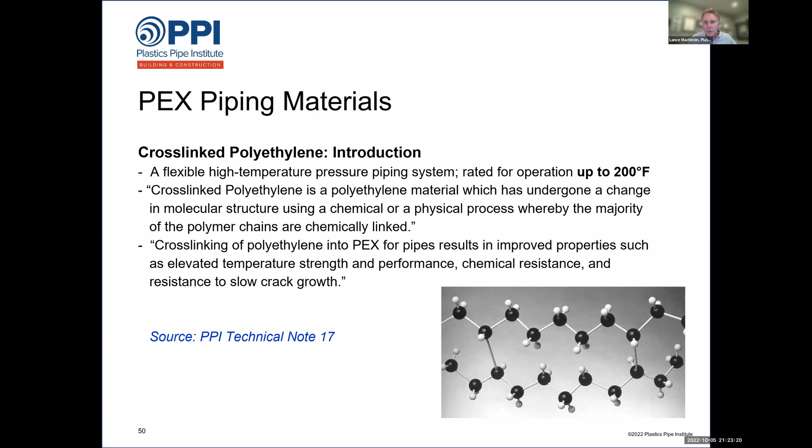PEX was actually invented in the 1960s and first put into commercial production in 1972—happy birthday, 50 years ago—for radiant heating applications, with hot water going inside tubing inside concrete floors throughout Europe. Now we do a lot of radiant heating over here too, but it was very common in Europe in the 1970s, and PEX was the material developed for that purpose.

So it's always been used as a hot water transfer pipe. It was then introduced into North America in the 1980s, and in fact the first ASTM standard for PEX tubing was published in 1984, so that's almost 40 years ago now. It's been around quite a while.

PEX tubing systems are approved and used in North America for water service line, hot and cold water plumbing, fire protection, radiant heating, outdoor snow and ice melting, geothermal ground loops, and other applications as well.

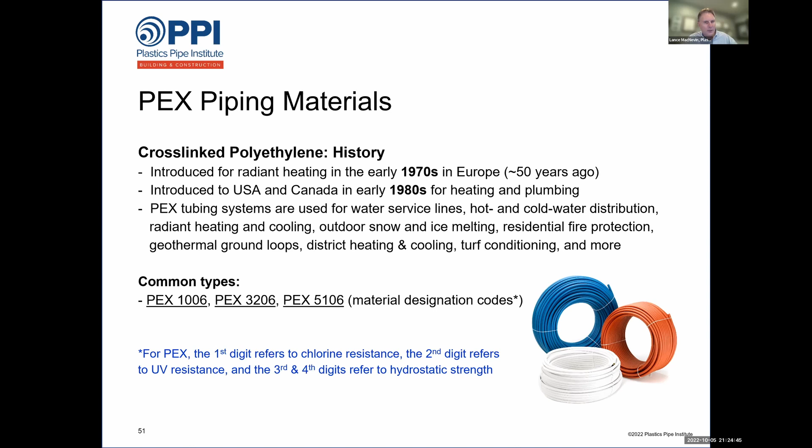The common types of PEX in terms of markings are shown here. It's always going to have the letters PEX on it, followed by a 4-digit code. Those four digits identify different properties of the PEX in terms of its chlorine resistance, UV resistance, and long-term strength—they're called the material designation codes. We won't get into that in great detail here, but there's a PPI document you can read that explains those codes.

In terms of configurations for PEX, it's available both in coils—you've seen lots of pictures of coil PEX—or as straight lengths. In a lot of cases, buying it as a 10-foot or 20-foot stick is actually more convenient for a plumber or installer, because if you want a nice straight run of PEX tubing through a basement or wall, taking it off a coil means you have to uncoil and straighten it first. That's not so bad, but it's an extra step, so a lot of plumbers use straight lengths just so it's faster to install for straight runs inside a building.

The straight lengths of PEX are just as flexible as the coil PEX. You could take a 20-foot straight length and coil it up into the same diameter coil as if you bought brand new PEX in a coil. It's the same product, just packaged differently.

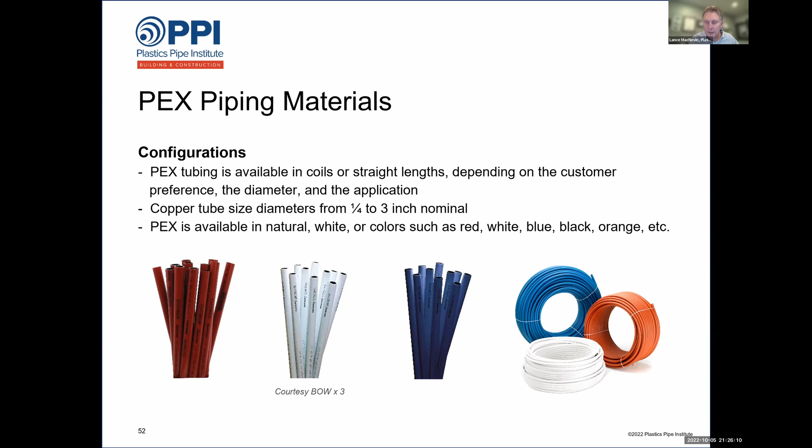The diameters of PEX are available from 1/4 inch, which is commonly used for ice maker tubing, all the way up to 3-inch nominal, but most manufacturers make up to 2-inch, so 1/4 inch to 2 inch is the most common size range. There's no standard color for PEX. Most companies make it in white, but also red and blue for hot and cold water plumbing. Some companies make a black or orange version or whatever color they want, as long as it's not yellow, because that would indicate gas. So there's a wide variety out there.

When it comes to general capabilities in terms of pressure rating, all PEX has to be tested and proven to withstand a pressure rating of 160 psi at 73 degrees Fahrenheit. That's a continuous use rating, and also 100 psi at 180 degrees, which we showed earlier. Most PEX products are also rated for continuous use at 200 degrees Fahrenheit, though I can't imagine an application where you'd actually need that. Even high temperature hot water radiators normally don't ever need temperature beyond 180 degrees Fahrenheit, but PEX is capable of it, even if you don't really need that temperature.

There are different methods of making PEX, and you'll hear this from different PEX salesmen: my company makes PEX A, also known as peroxide, or my company makes PEX B or PEX C. There are 3 different methods that were developed in the 60s and 70s for cross-linking polyethylene into PEX, but the letter designations aren't related to any type of performance or rating system, just based on which came first. The first type was called peroxide, then came the silane method, then the electron beam method. So in Europe, where all of this was developed, they decided to call it PEX A, B, and C as shortcuts - A came first, then B, then C.

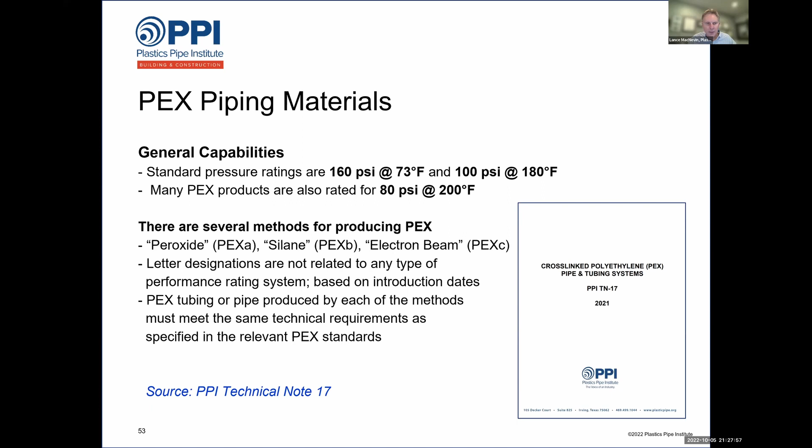All PEX tubing, no matter what method is used to produce it, has to meet the same requirements according to the standards. A really good document that's a free download is PPI TN17. That's kind of your handbook on PEX that'll explain the history and all the codes, certifications, and standards. It's a good document.

Now let's go back to radiant heating again, which we've talked about a couple times. When they started using plain PEX tubing for radiant heating in the 1970s in Europe, they thought this was the perfect material because it could withstand the temperature and pressure, and the tubing was encased in concrete, and life was good. The problem was, a few years later, their cast iron boilers and cast iron circulating pumps - back then 100% of everything was cast iron - started rusting from the inside out. It took a while for engineers to figure out that plain PEX tubing actually allows oxygen from the atmosphere to pass through the wall of the tubing and get absorbed into the heating system water inside, which can cause rust.

That's obviously not a good thing in a closed loop heating system, but it's not an issue for plumbing. For plumbing, we have oxygen in our water all the time, and the water passes through once and then goes down a drain. But in plumbing systems, we don't have cast iron or steel components - everything is non-ferrous and can't be corroded.

So for radiant heating systems or any other closed loop heating system, engineers realized they needed to make the PEX tubing oxygen tight in some way. They shopped around and found another type of plastic known as EVOH, or ethylene vinyl alcohol, that could be applied as a very thin coating or layer to the outside of the PEX tubing during manufacturing, making the tubing oxygen tight. The EVOH coating itself is clear and transparent, you can't see it, but most manufacturers, when making tubing for heating applications today, color the adhesive that holds the EVOH onto the tubing, usually red, to indicate this is for heating applications, or maybe some other color. You can see that colored adhesive under the EVOH because the EVOH itself is transparent.

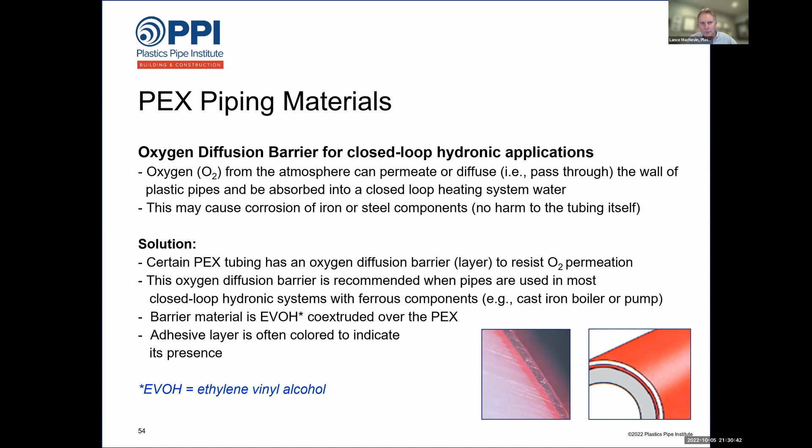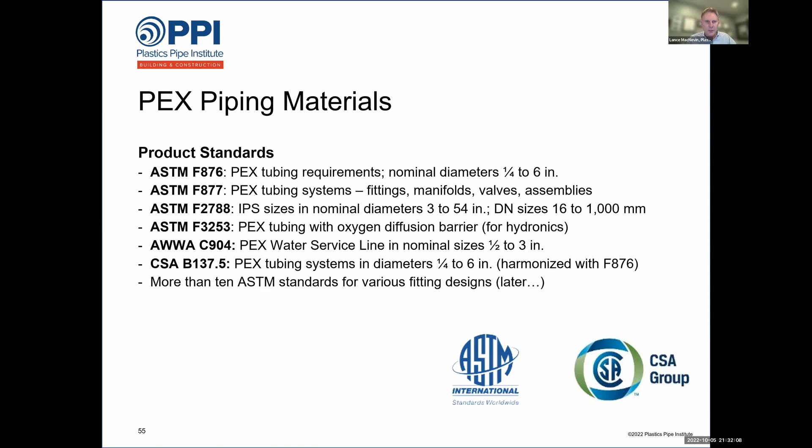If you were looking at PEX tubing for a water service connection, bringing water into a house, that is typically also marked with the American Waterworks Association number C904. That's the AWWA standard for PEX water service line. And the Canadian standard for PEX tubing is called CSA B137.5. So there's a lot of PEX tubing out there marked with F876, F877, AWWA C904, and CSA B137.5, all on the same piece of tubing.

Earlier, when we talked about polybutylene, we talked about chlorine, and I said that now it's a requirement that all PEX tubing is tested for chlorine resistance. We recommend that you read this PPI document to learn more about that — it's on our website, and you can download it as TN53. I won't get into all the details because we don't have time tonight, but the testing is done in accordance with an official ASTM test method known as F2023.

So a lot of the tubing you'll also see marked as F2023, which shows that tubing has gone through chlorine testing. That testing takes about 2 years to run and costs a manufacturer about $150,000. It's a very rigorous test, and they test lots of different samples at different temperatures and different pressures.

But the end goal of that testing is to prove that when you put that PEX tubing in potable water service, it can withstand continuous pressure of 80 psi at a temperature up to 140 degrees for a minimum life of 50 years. And that assumes the chlorine level in the water is at 4 parts per million, which is the EPA maximum for chlorinated water leaving a water treatment plant.

Nobody's water is that bad. The average in the United States is about 1.2 parts per million. But the tubing is actually tested at 4 parts per million. So it's mandatory since 2002 that all PEX tubing for potable water is tested in accordance with this test method. That's been 20 years now that this has been a requirement, and it's a good thing, because it means the tubing is safe and resistant.

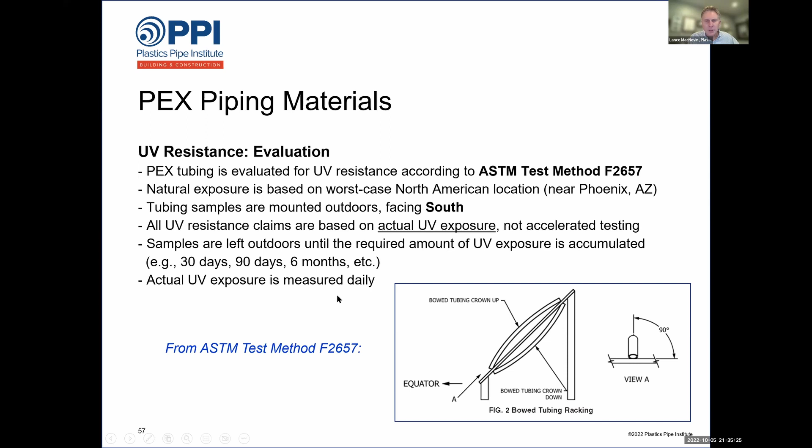Excuse me. It's late in the evening. We've been talking a lot today.

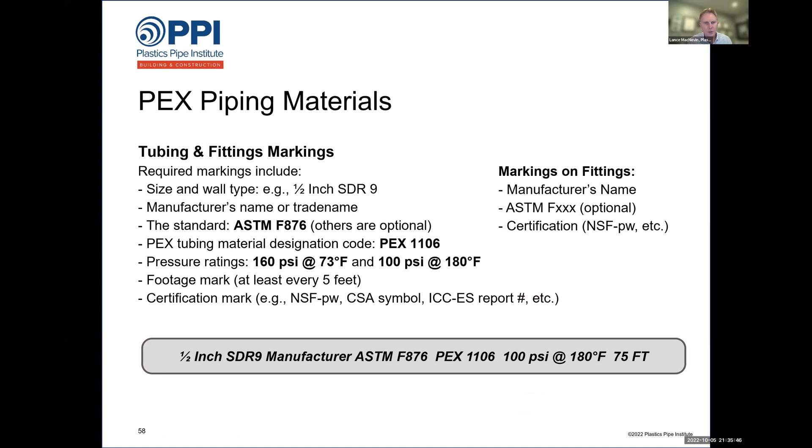In about the 5 or 6 minutes I have left here, let me get into the joining systems that you'll see for PEX, because this is important.

PEX tubing is not joined with any kind of solvent, cement, or glue. It's so slippery, it has very low surface polarity, meaning it's hard to get stuff to stick to it. That's a good thing, but it means you can't glue it together.

Glue just won't stick. So all the PEX fittings work on the principle of a compression seal, meaning the tubing is compressed over ribs in the fitting, or in the case of push fit fittings, there's an O-ring seal on the outside of the tubing.

The fittings used for PEX systems are made of either lead-free brass alloys, and that's a requirement by law now that they must be lead-free, or these engineered polymers known as polysulfone, PSU, or polyphenylsulfone, PPSU, which are the polymers that I talked about earlier.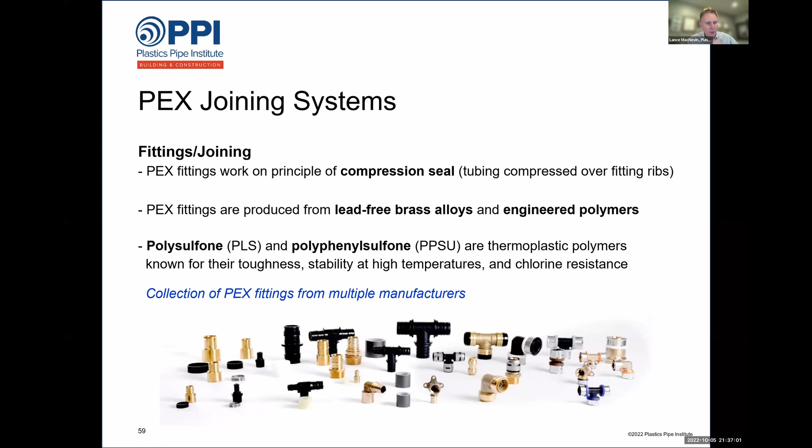And those polymer materials are tested and proven to be highly chlorine resistant.

Now, there's a lot of different PEX fittings out there in terms of their shapes and how they actually join to the tubing. And all those PEX fittings out there actually have their own ASTM standard to describe the materials that can be used, the dimensions, the tolerances, and how the assembly takes place.

So it's a collection of fittings, and they'll all have their own ASTM standard marked on them. F877, the one we talked about before, is the standard used to test them all for joint integrity, but then all these other numbers apply to different fittings. So I'm going to show pictures of those.

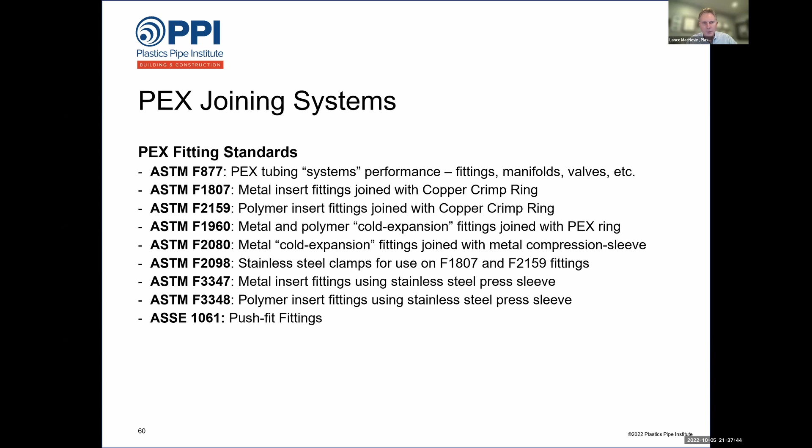One of the most popular PEX fitting systems out there, and it's been around for more than 20 years, is described by the ASTM standard known as F1960. It's also called the cold expansion fitting using a PEX ring.

This was pioneered by a company known as Wirsbo back in the 1990s. Now the company is known as Uponor. They pioneered this fitting, but now there's a lot of other companies that make the same version of the fitting according to the same ASTM standard. The fitting body itself could be either plastic or lead-free brass.

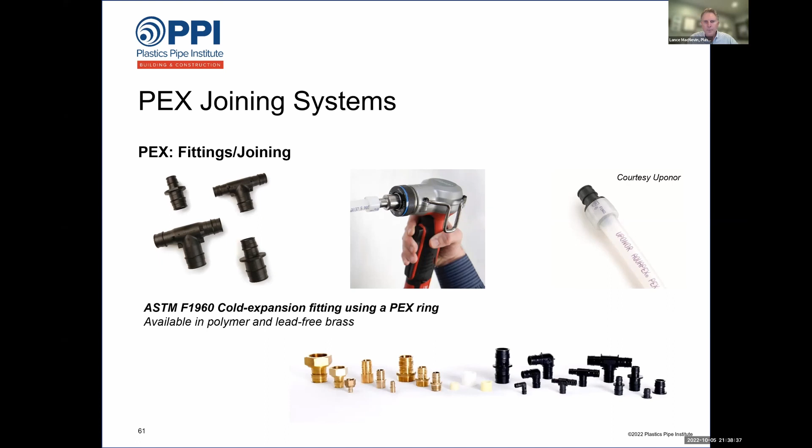And the basic principle is you put a ring of PEX over the end of the tubing, and then with either a hand tool or an electric tool, you expand both the tubing and the ring together to make them bigger. Then you've got a few seconds to get the fitting inside before the tubing shrinks back, and then it makes a tight seal.

The other most popular type of fitting system is known as a crimp ring fitting system. This is the same type of crimp ring fitting that was used in polybutylene, although different materials and different dimensions nowadays. So it could be a brass fitting that goes inside the PEX.

And if it is, that's made to an ASTM standard called F1807. The copper crimp ring has a black coating on it to make sure it's not a polybutylene crimp ring, because they are different in dimensions.

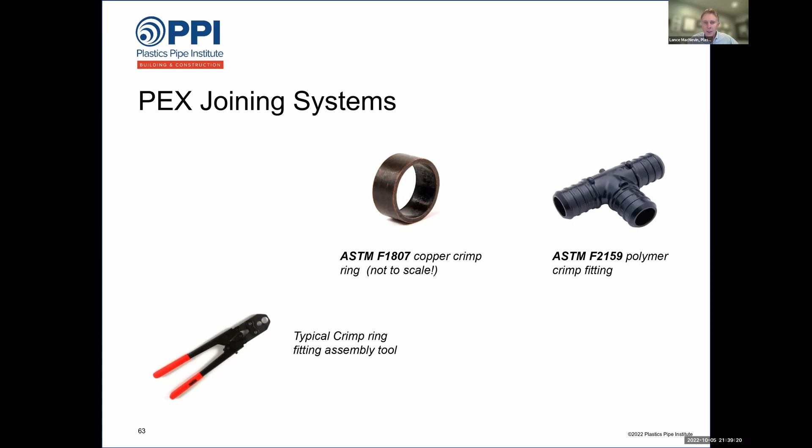And then you can also get the same kind of fitting but molded in plastic. If it's molded in plastic, then it's made to the ASTM standard called F2159. But it uses the same crimp ring and the same tool.

Now, in some cases, people don't use a copper crimp ring. They use a stainless steel clamp with a crimp ring fitting, but instead of the ring, they're using a stainless steel clamp. And in that case, those clamps are made to a standard called F2098.

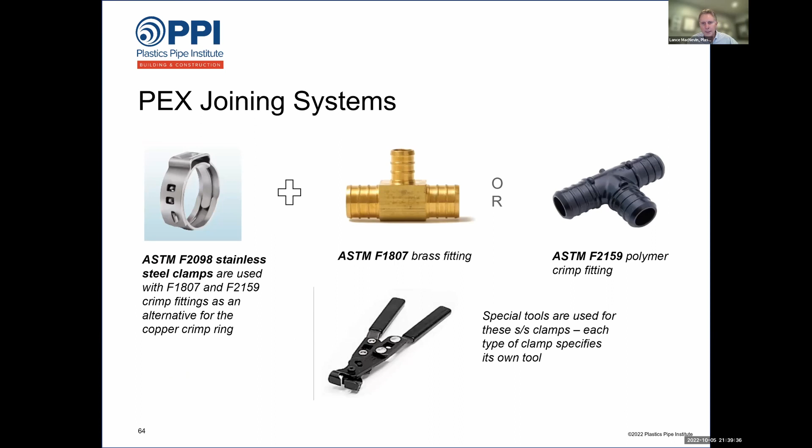There's another type of compression fitting out there that uses a stainless steel clamp, not the banded clamp, but in this case, it's more of a stainless steel cup that gets compressed over the fitting.

These fittings were pioneered by a company called Viega out of Germany. They could be made of polymer or brass material on the inside.

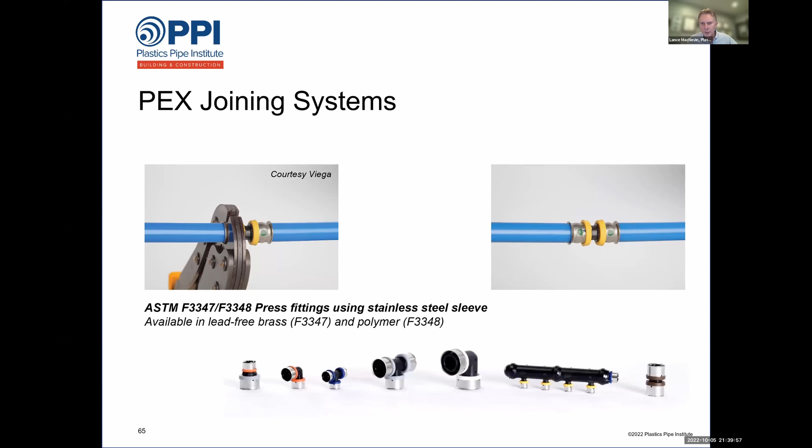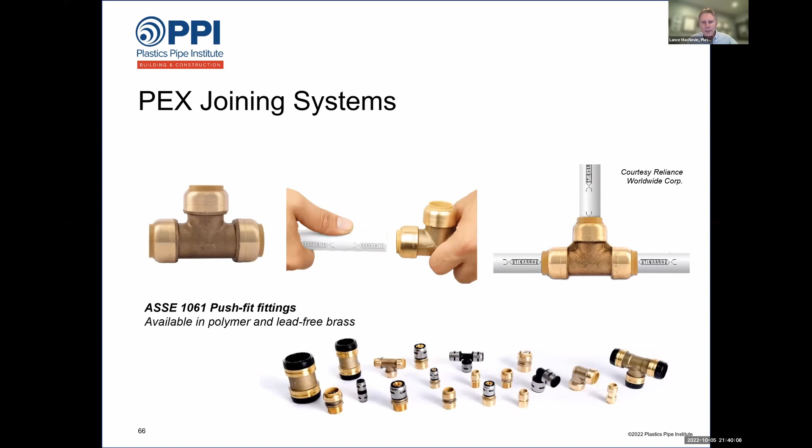There's also push fit fittings. The push fit fittings developed for use with copper or CPVC also work equally well with PEX. Those fittings can be made out of brass or a polymer material, the same type of polymer used in the other fittings. So it's a wide variety of fittings.

You can get valves with PEX ends directly in the end of the valve. So for plumbing systems, you could have PEX coming out the wall to a quarter turn stop below a sink or a toilet. In a lot of cases, people transition from PEX to copper inside the wall with a copper stub out, so copper comes out the wall where you could use a regular compression valve, but most of the plumbing inside the wall is actually PEX.

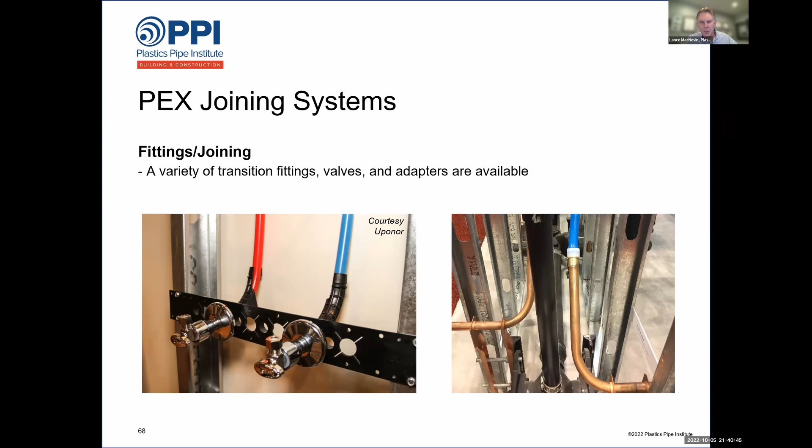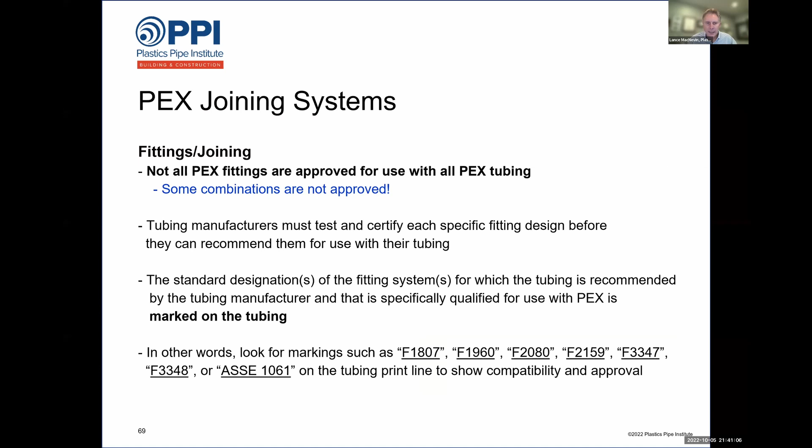The most important thing to point out, and then I'm done, is that not all PEX fittings are approved for use with all PEX tubing. Each tubing manufacturer will actually test the fittings they want to endorse with their tubing to make sure they're completely compatible, and then they'll mark that ASTM number on their tubing if they recommend it for use with it.

In this example, the white tubing at the top, you can see all the markings on the PEX. It's marked with F876 and F877, 2023 for chlorine testing. It's also marked with F1807, the crimp ring fitting, F1960, the cold expansion fitting, and F2080, another type of cold expansion fitting, marked right in the tubing to show it's compatible.

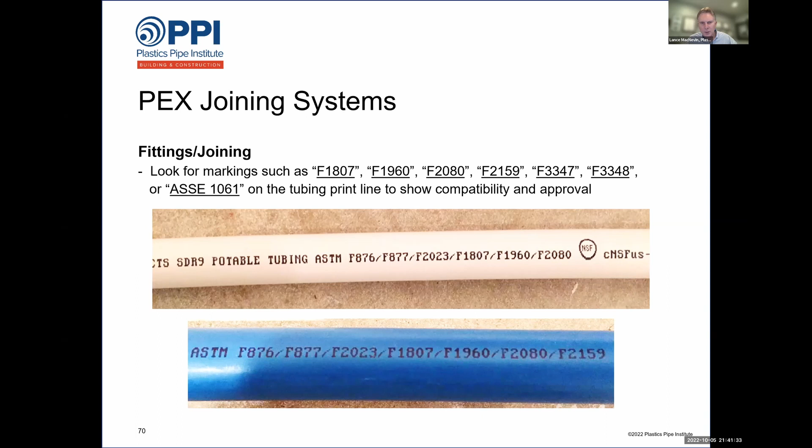There are different manifolds, but that brings us to the end of PEX.

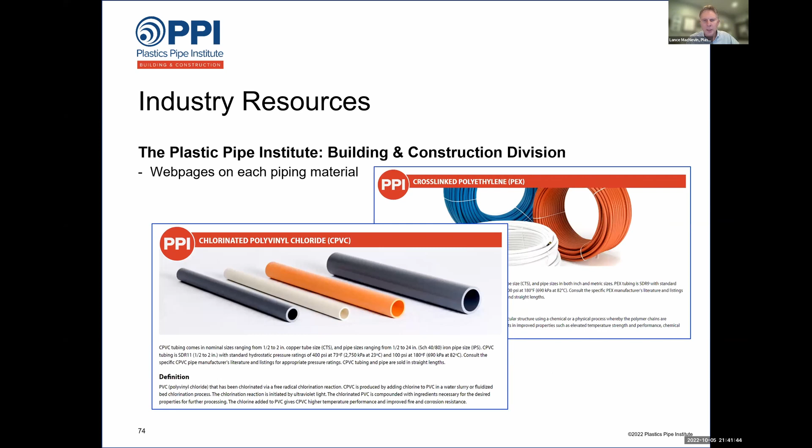We have a few slides here on industry resources. We invite you to go to the website. You'll find a web page on each of the materials we talked about tonight. We have a calculator for doing pressure loss sizing, and we've got different versions of presentations on our website, some recorded ones and some slides you can download.